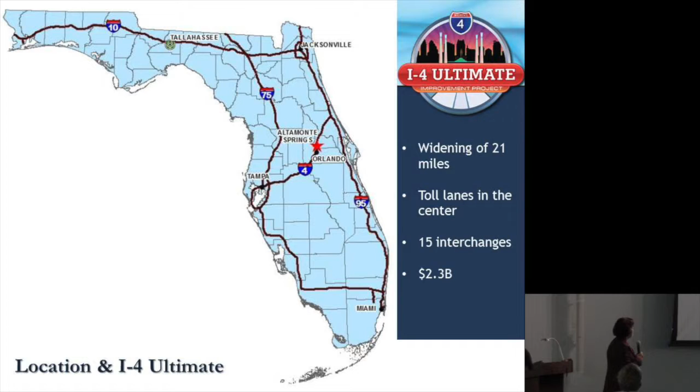To give you a little background, this is the I-4 widening through Altamonte Springs, and okay, I said I wasn't going to do this when I watched everybody else falter with this, but I want the pointer. This area here, the DOT bought land for their multiple retention ponds along I-4. This was a big area within the city. It was bought, the houses were condemned, torn down, ready to build a pond there, but we were able to stop the project before that happened.

We happen to have a stormwater system called Crane's Roost that sits right in the middle of the city. It's a focal point of the city, a feature. It's been turned into kind of a lake feature. In the previous operation of this stormwater facility, it's a landlocked basin, so it's pumped to the Little Wekiva River when it reaches a certain elevation to prevent flooding in the area. We could not take more stormwater into that basin and still continue discharge to the Little Wekiva River, which is a protected basin, but we did have the capacity to take it if we could just pump it somewhere else. So that's where the idea of integrating it with our reuse system came about.

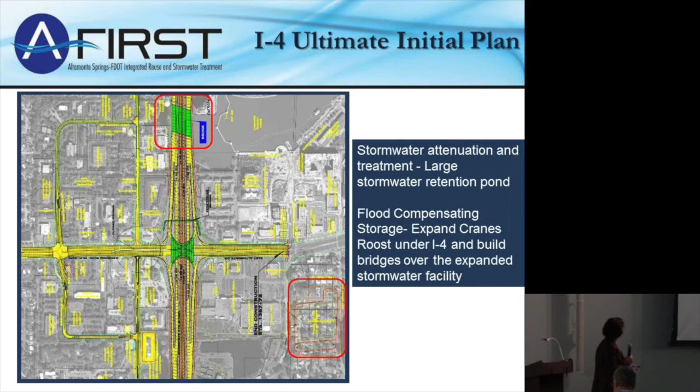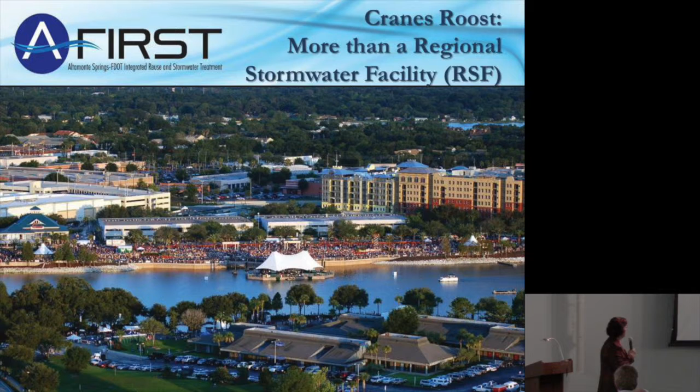This is Crane's Roost. We have major events there. This may be the 4th of July festival. It's actually the 3rd of July, called Red Hot and Boom. We have a big Christmas festival. So even though it's a stormwater feature, it's very important to the city.

The operation of this system as a stormwater system involves pumping the water. It's underneath I-4, pumping it previously to the Little Wekiva River, and now our new project is to pump it into a treatment system.

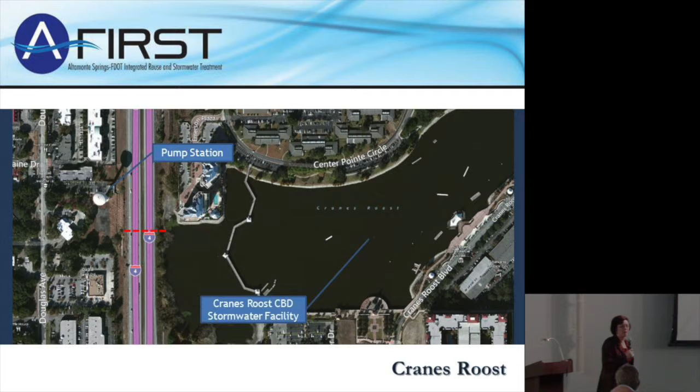Part of this project too, even though DOT had already purchased the land for the stormwater pond, they hadn't built it yet, so they can avoid the need to construct and operate it, but also be able to take more water into Crane's Roost and pump it out. They were previously going to have to build a bridge over Crane's Roost, and we helped them avoid constructing a bridge, which was an incredible cost savings and helped their ability to fund the project.

This is our regional water reclamation facility. The other side of this project is we have this facility that supplies the water to APRICOT, our public access reuse system. It's as close to 100% reuse system as you can get. During the hot summer months, we have to augment it with potable water, but during the rainy season, we still have a discharge. It's a small amount, but there is a discharge to the Little Wekiva River also.

And we're being faced with TMDLs, which are going to make us have to go to very high levels of treatment, RO treatment, membrane treatment, or eliminate the discharge. So while we're looking at this ability to add more stormwater to our reuse system and maybe dampen some of the need to augment our system, we still have this discharge problem.

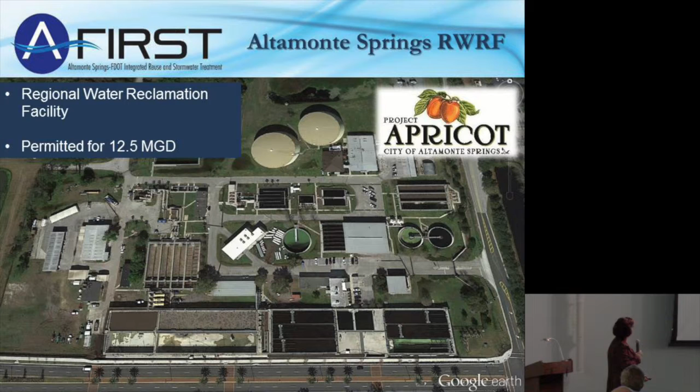So some of the options for the water reclamation facility would be to just build a lot of storage ponds so we can truly use 100% of our reclaimed water to avoid the discharge, or go to that drinking water level of treatment where we'd still discharge but remove all the nutrients. On the stormwater side, we could keep pumping from Crane's Roost into the Little Wekiva River, but we would not have been able to accommodate the additional water from the I-4 widening project.

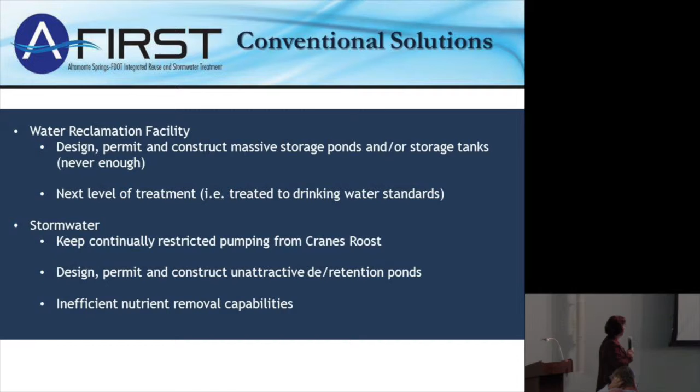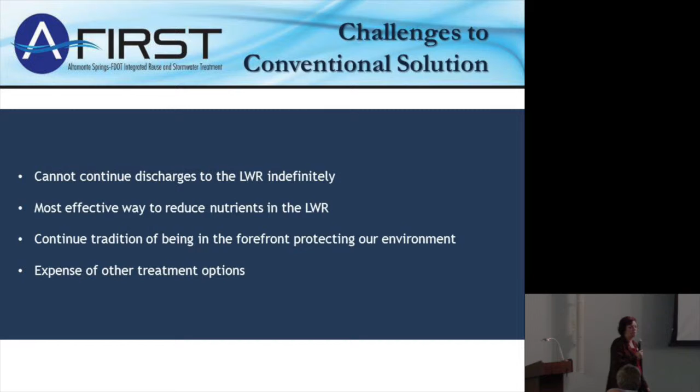And the city wanted to continue being in the forefront. We like those acronyms. We like the apricots. We wanted our next A word to come into play. So that's what brought this project forward with what was at the time an unconventional solution. We did modeling to support our project to show that we could still provide the stormwater volumes we needed within Crane's Roost. And of that, about 1.5 MGD on the annual average is going to be treated through a regional treatment system.

In Florida, you can use stormwater for irrigation and reuse without any treatment, as long as you're using just stormwater. But once you blend it with reclaimed water, you're required to meet the requirements of Chapter 62-610 for public access reuse. And as a utility person, I have to support that. We don't want to do anything that would ruin the integrity of our reuse system. But I know there's been a lot of questions about that and trying to get more projects pushed forward. There may be things we could do that don't require the same level of treatment and are still protective, and that's probably something that needs to be examined. Our treatment system, we call it a reduced augmentation facility, or RAF.

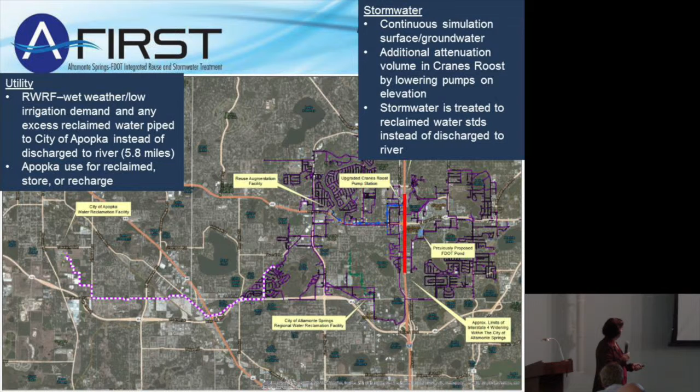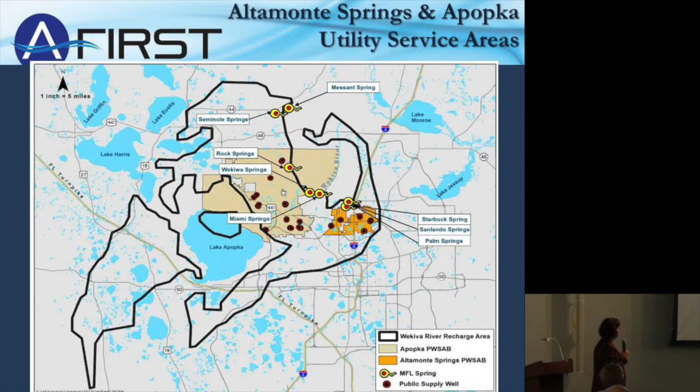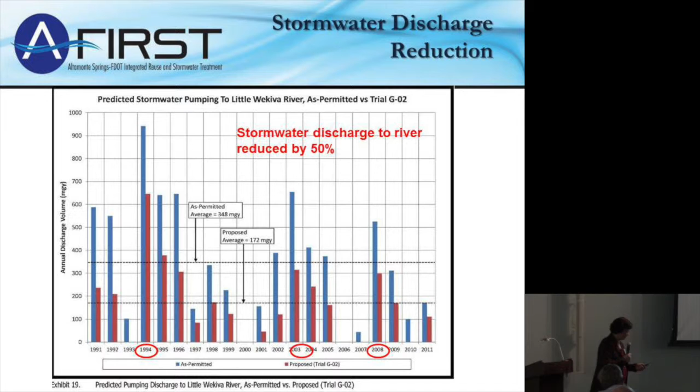The bottom line of this is we're going to be reducing stormwater discharge to the Little Wekiva and reducing nutrients, a little over 3,000 pounds per year of nitrogen and 600 pounds of phosphorus. Even larger is what we're reducing on the wastewater side from our wet weather discharge. Even though the volume is small, the nutrients are high, so we're going to be eliminating almost 60,000 pounds of nitrogen per year and 27,000 pounds of phosphorus a year by this project.

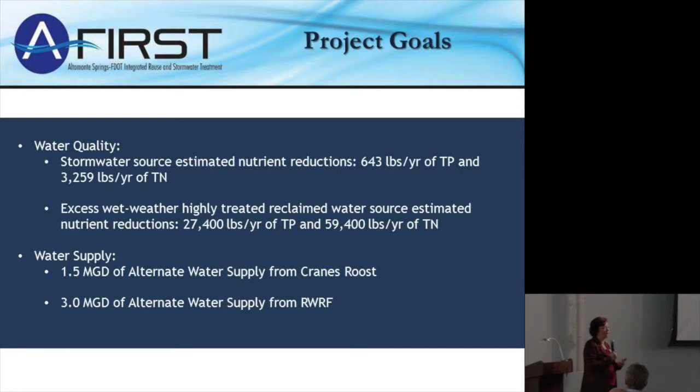On the water supply side, we're providing a total of 4.5 MGD of additional water to the city of Apopka. 1.5 of that is coming from the Cranes Roost stormwater side. The remaining 3 MGD is from our wet weather discharge to the Little Wekiva. It wasn't apparent in my talk, I had to cut a lot of this out to fit in the time frame, but of the 1.5 MGD, about a half an MGD is actually coming from I-4. The rest would be coming from our watershed and what we'd be reducing from our normal discharge to the Little Wekiva.

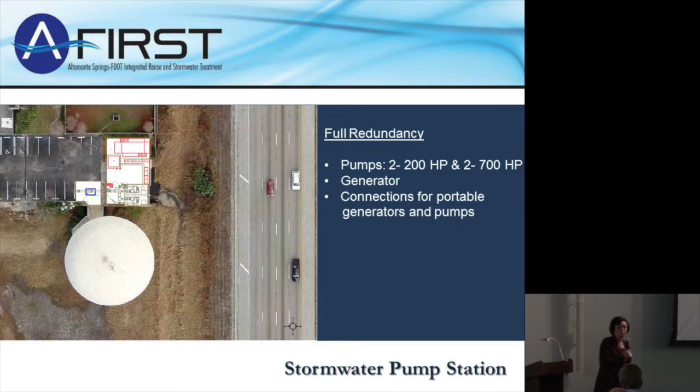The project is now constructed. We started operation back in September. This just shows some of the components. Some of these are pre-construction, but we had to build a larger pump station adjacent to I-4 to take the water from Cranes Roost. We put in two 200 horsepower and two 700 horsepower pumps and generators.

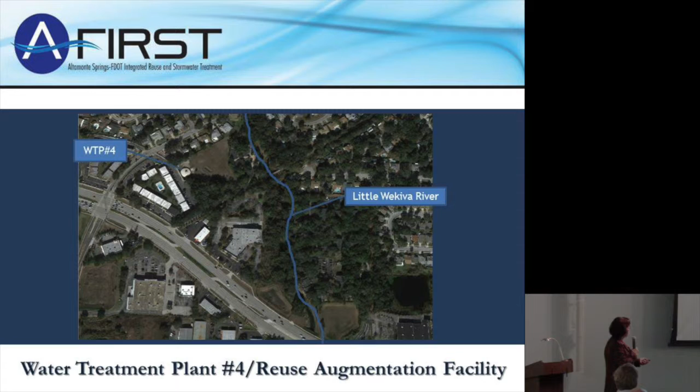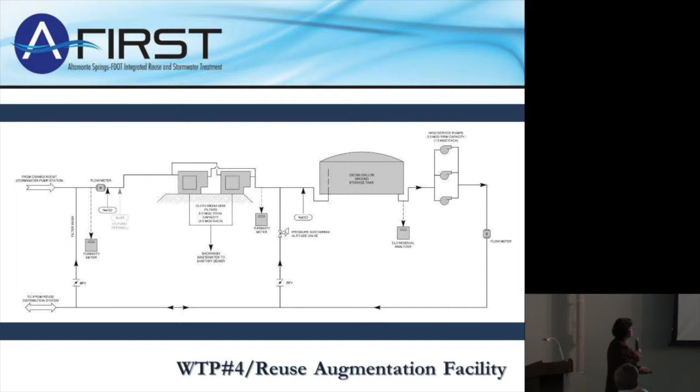We built what we call a reuse augmentation facility at our former water treatment plant site. This facility includes cloth disc filters, chlorination, storage, and then pumping into our reuse system. There was an existing pipeline that led from that pump station almost to this water plant site, so we just had to refurbish that pipeline and build an extension.

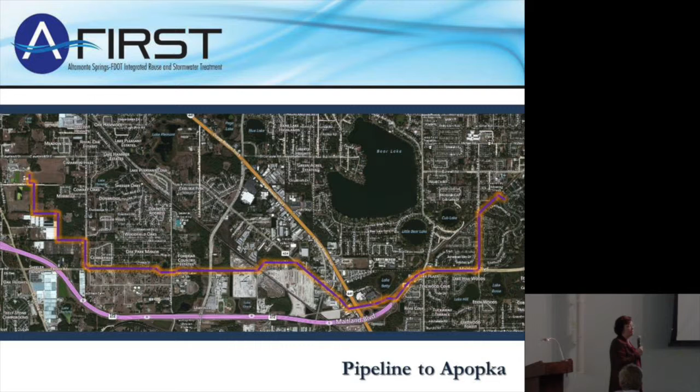And then we built the almost 6-mile long, 24-inch diameter pipeline to the city of Apopka for taking the excess water. It's a goal of the city of Altamonte to use as much as we can within the city and then deliver the extra to Apopka.

The project budget, the construction budget, was $12 million, but including design, easements, engineering, and everything, it came in at about $12.9 million, which was just 3% off the estimate. And Ed Torres, my boss, likes to brag that they did this pretty much on a napkin, like you do a lot of projects at this time. And so just to have it come in so close to what they estimated was pretty amazing.

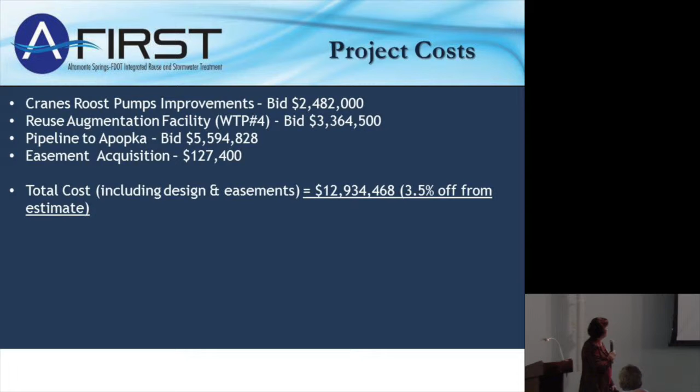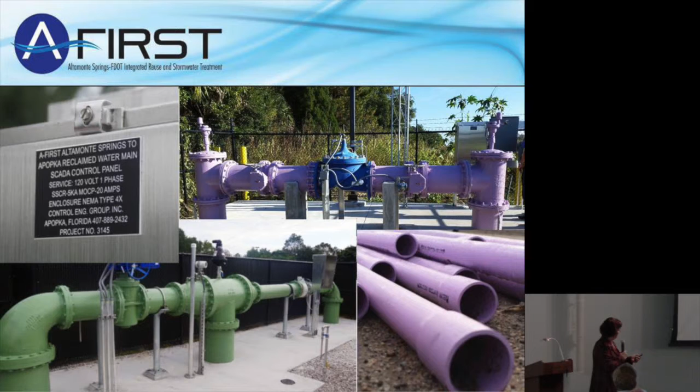This isn't a cookie cutter type project. You're not going to be able to build this exact same thing somewhere else, but I hope the lessons learned is look outside the box, and with persistence, there are ways to make things happen, especially if it's something that makes as much sense as this did as far as eliminating the nutrient discharge and providing alternative water supply.

Just give some shout outs to some of the people involved. We had a number of engineering firms. Pegasus and Devo did our stormwater modeling. Reiss Engineering did the stormwater pump station and force main. Tetra Tech, our reuse augmentation facility, and the pipeline to Apopka was by AECOM. Construction was with Wharton Smith and Lane Heavy Civil.

These are some of the benefits we've gone through as I was talking, but it's a major alternative water supply that alleviates unmet demands in the Apopka service area. It reduces groundwater pumping needs, which helps protect spring flows and MFLs. There's significant overall nutrient reduction to the Little Wekiva River from non-point and point sources. And this will have ancillary benefits in the springs, which have been noted to be having nutrient impacts.

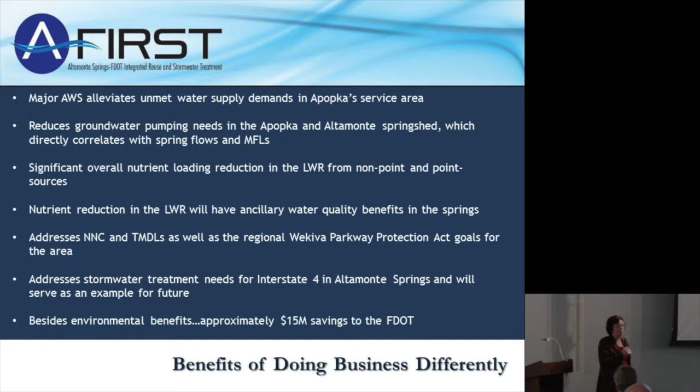It addresses stormwater treatment needs for I-4 and Altamonte and will serve as an example, as we've already heard during the CFWI process. The doors were open to entertaining other options, and this environmental look around is now happening to help identify other opportunities. And besides the environmental benefits, it's saving about $15 million to DOT just from not having to construct that bridge and not to have to operate the stormwater system.

What's next? We're not stopping here. We might need to come up with another A name, but our next goal is to look at potable reuse. I know that's been a big focus of this session, and my paper is different. It's not about that, but it is something we're pursuing. We have a project now, hopefully under consideration, with St. John's River Water Management District for grant funding, and would like to be helping out with this next generation of water supply. Even if we're not at that point, we're not having the critical droughts, we need to be prepared for the future.

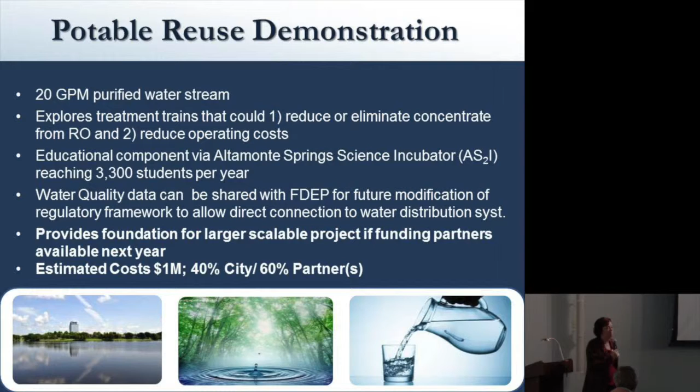So developing those regulations now makes sense instead of doing it on the fly or after the fact like they had to do in Texas. So if this is someplace we may need to be in even 15 years, we need to start the work now. It can take 5 to 10 years just to develop the regulations.

One thing that we think makes us unique for this, our other A word, is our science incubator program called AS2I, where we bring in several thousand middle school and high school students into our plant during the school season, going through some different experiments, but we'd love to integrate a potable reuse project into that and expose these young minds that can take it home to their parents and into the future that potable reuse, it's not a big deal. There is no yuck factor to it. We believe you need to start young to get that mindset started.